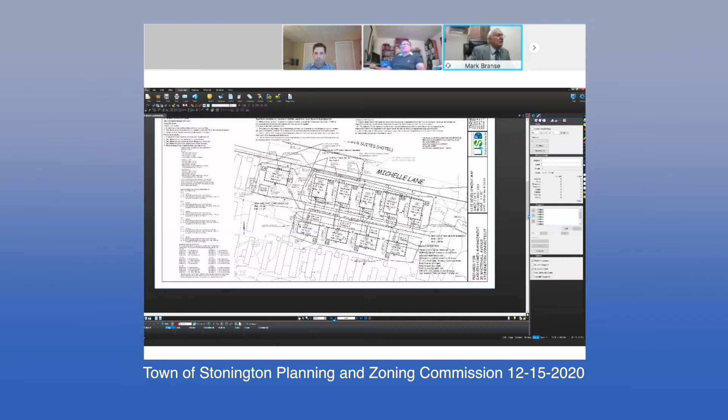The fire chief for the Old Mystic Fire Department has reviewed these plans and did a report. He's satisfied with the access. He wanted to clarify that we connect out to the driveway, which we do, with no barrier there. He also asked for no parking signs on both sides of the new driveway, which is fine with us. We have 2 parking spaces per unit already, and there will be no curb, so if someone wanted to pull over, they could. The fire chief has reviewed it and is satisfied with the access.

I want to add one other thing too. I said 30% of the units are required to be deed restricted. We are doing 4, however, out of 10 units - 2 at 60% and 2 at 80%. It just made the math come out easier.

This area does have city water, but for fire purposes, this does have city water, of course. Okay, so thank you, Mark, that's helpful, and I did look at the fire chief's report.

But the question is, is fire suppression required within the unit - sprinklers? I don't think so, no. Not that I'm aware of, no. Okay, I think that should be reviewed by the building official. I don't think it holds up anything tonight, but because of the close proximity, it may be a requirement. I'm not saying it is, but it may be, and it needs to be looked at closely. Certainly if the fire code requires it.

Oh, Mr. Friedman, go ahead. Yeah, hi, Richard Friedman, I'm with Garden Homes, I'm the president. Fire sprinklers are not required in manufactured homes in Connecticut. We've actually replaced a number of the homes since we purchased Fair Acres a couple years ago, and none of the homes were required to have sprinklers.

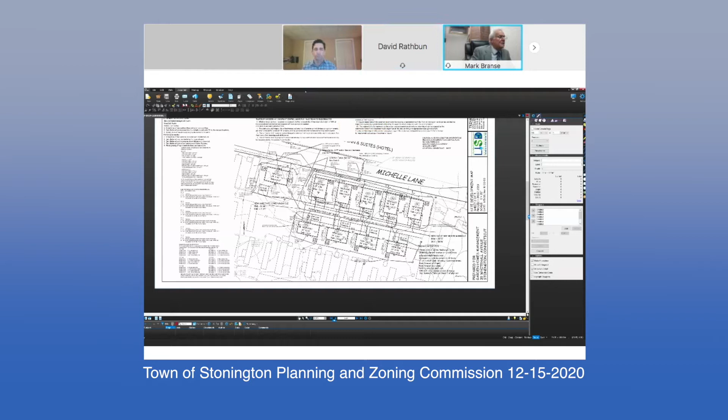Let me share my screen at this point and I'm going to show you. Let's see if I can get it to go where I want. Wait a minute, my computer - you can do this. Okay, there we go, can you see this? Can you, when I share - no, okay, hang on, all right, let's try this. Okay, now? It's just started. There you go, yes, okay, good. All righty.

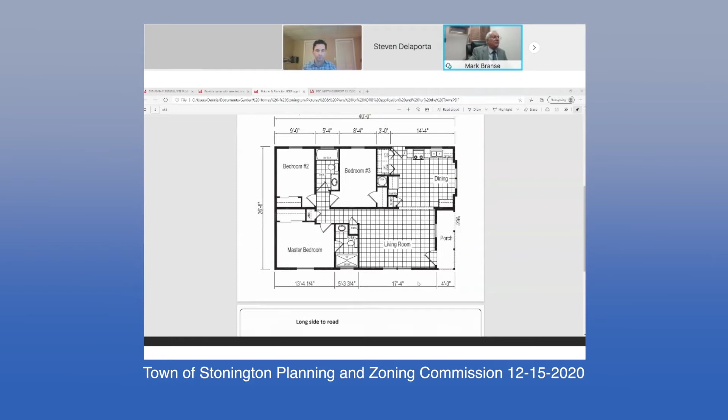I'm sure you have this in your packet. We do have the floor plans for each of those units, and I won't spend time on those unless you're really interested in them.

I want to turn to the DEEP report for a moment, which I know you just got today, and I'm going to deal first with the question of the dock. The DEEP letter tells you there was a violation of a dock placed in the Mystic River without permits, and says that as of 2020 aerial photos, it was still there. This perplexed us because Garden Homes bought this park in 2019, and there was no dock there, and there was no dock there this summer. We never put it in. So we couldn't understand how it was possible for DEP to say there was a dock there.

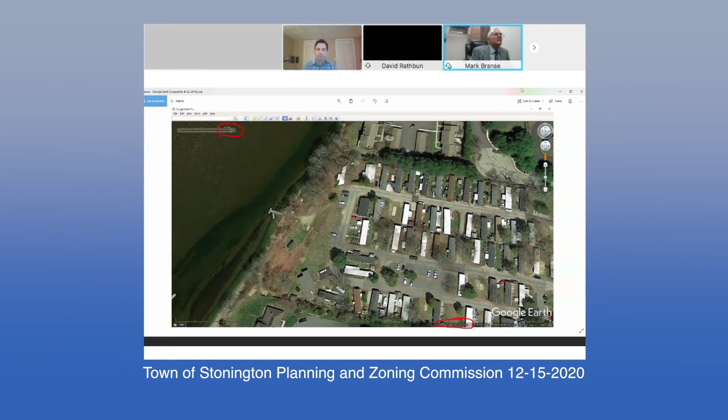Okay, the other question raised by DEEP was public access. They point out that this use is not water dependent, which is correct.

What I would point out from the site plan is that we're not changing anything along the water. I will tell you that we did consider adding units at the west side of the property and decided not to, specifically because of the water dependent issue. So the use of this property along the water is not being changed, it's already existing. The only changes we're making are nowhere near the river.

So we don't feel that public access is even required. I think the DEEP is wrong as a matter of law. We are proposing no use along the water. And also, as noted in your staff report, these are basically common driveways, and it is simply not suitable for public access. These are 16 to 18 foot wide roadways.

People occasionally park on them, and it's just not suitable. We don't have the parking for a public boat launch, and it just isn't a suitable location. And being at 830G, we're not required to either. So we respectfully disagree with DEEP concerning public access. This just is not a good location for a public boat launch.

I think on this map you should be able to see the flood zone line. It's a dashed line. I'm not sure if you can see my cursor, but I believe this is the heavy dash line, which is the zone delineation between RA20 and RC120. Okay, I can see it on the enhanced drawing.

Thank you. That is the confusion I was having, because I looked at FEMA's record copy too, and I couldn't tell what the elevation was. So, thank you, that's helpful.

Is this site in a LIMWA, a limit of moderate wave action zone? I don't believe so. We are certainly aware of LIMWA requirements to be plotted on our survey maps, and we do not show it here. I do not believe it's in a limited wave zone. And if you were familiar with its location, you would understand why.

Because if it were adjacent to such steep slopes, I would have concern about the slopes being destabilized from wave action, because once they start to slip on a slope this steep, you could get a lot of movement.

Yes, I would agree with that. But I'll point out that this property has been here for an awful long time, and the building lot itself has been here since 1985. I've been all over this site, up and down, and I haven't seen any evidence of erosion along the shoreline at all. Indeed, the tidal flats seem very stable. The gravel road itself shows no erosion, and certainly no erosion on the slopes of the lot itself, even though they are steep slopes.

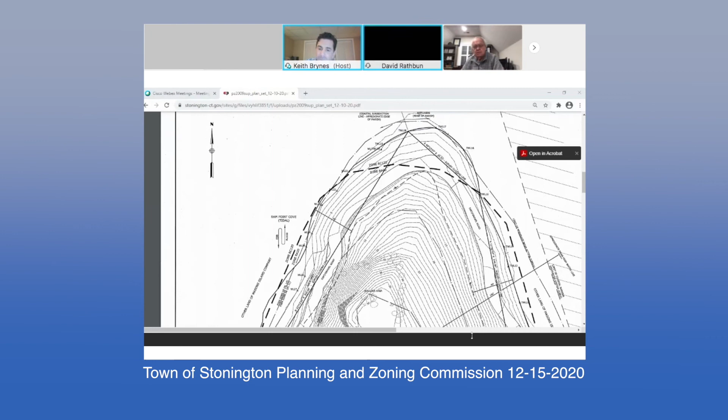Just one comment, really. I'm not familiar with this application, I haven't followed it, and I wasn't really prepared to speak on it tonight. But from my past experience, this just seems like a backwards process — seeking approval for a conceptual plan for marketing the property, knowing that what's proposed won't be built, and the applicant will be back for something else in the future. It just seems to open yourselves up for a lot of problems down the road. So maybe you can enlighten me, but I'm just not familiar with that type of process.

Thank you. May I address that? Sure. I think the only thing that could possibly change on the site itself is the house itself, and maybe the type of retaining wall they may choose to build. But the fact is there's only one way to get up to the top of that ledge knob, and that's with it knocked down at 6 foot.

That's the alignment we've shown on that driveway that cuts across the slope. Now, if a future owner wanted to knock the ledge knob down another 6 feet to 12 feet, there would be more ledge excavation, but the driveway would be less steep. And with the retaining walls, you'd probably — and I know for a fact because we looked at it — lose at least one of the retaining walls and a good portion of a second one, but at the expense of an extensive ledge excavation.

So my point is that the only thing that really could change here is the house itself and the type of retaining wall. The alignment of the driveway is pretty much the only way you can get up to the top of the hill. Thank you.

Anyone else like to speak on this application? Any general comments? Keith?

Sure, so we did get comments from other departments on this. As Mr. Biscuti said, the town engineer offered a few comments on this, and the plans met his review. DEP commented.

One of the things they talked about is whether the existing gravel drive around the tip of the peninsula could be turned into a vegetative buffer, because it's not being used anymore. But the applicant's response is that they're going to need the gravel drive to get to the septic system, and it's the only way to get there because it's at such a different grade from the house. So that really wouldn't be possible.

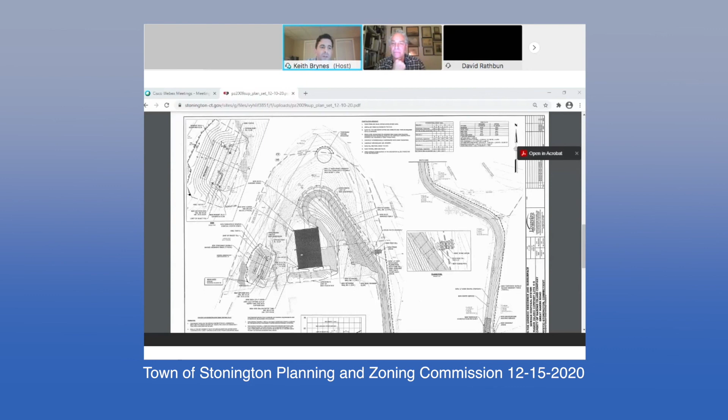I'm sorry, Lynn, we're not hearing you. Lynn? You can't see me, you can't hear her. Can you hear me now? Yeah, we can. Okay, do you vote aye? Yes, I did. Okay, thank you. I'm not going to mute my phone again, guys, because I think there's a delay. A long one. I'll just be very quiet.

Do I hear a motion on this application? Do we want to take them in three separate votes? Yeah, why don't we? Okay, I'll make a motion to approve the CAM. Second. Any discussion? All those in favor? Aye. Aye. Aye. Opposed? Who's opposed? You? Me, Ben. Okay.

Make a motion to approve the waivers as presented. Do I hear a second? Second. Discussion? All those in favor? Aye. Aye. Aye. Aye. Opposed? Opposed?

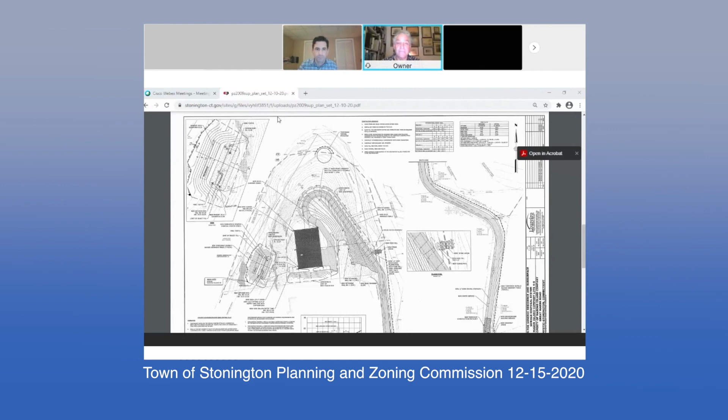Under further business, we have no new applications in the works. No new applications came in today. So we will not have the first meeting in January because we have nothing to do, unless we want to just sit and discuss something. At the present time, we'll have the second meeting in January, probably for administrative reviews, Keith. That's about it, isn't it? So far, yeah. We won't have any public hearings in the works. No. It seems to me COVID has slowed things right down, and something's happening.

All right, just so I'm aware, there's no meeting on January 5th, right? And the next meeting is on January 19th, right? Correct. Okay. Just a regular meeting, no special meeting in January. Okay, I just want to mark my calendar so I'm on board. Is Fred still on? Did he leave? He was. He is still here. Fred, you got this to get that? Yes, I did, sir. Okay.

So we'll see you the 19th of January. All right, happy holidays to everybody. Yeah, happy holidays. Thank you. You too. Merry Christmas and Happy New Year, and see you all next year. Let's hope it's better next year. Happy New Year. Happy New Year. Bye, y'all. Thank you, Keith. Bye. Thank you. Bye. Bye. Bye-bye.